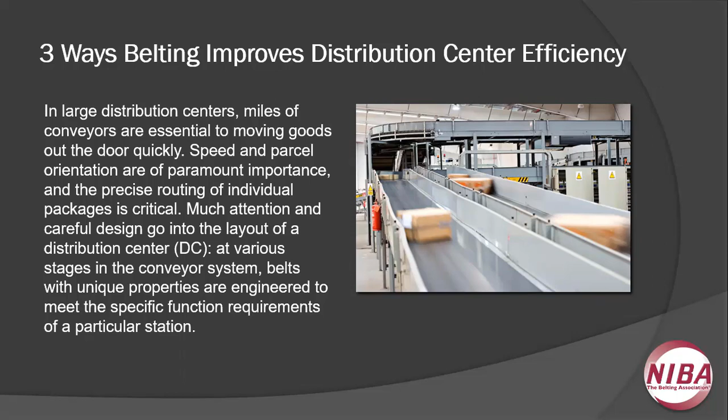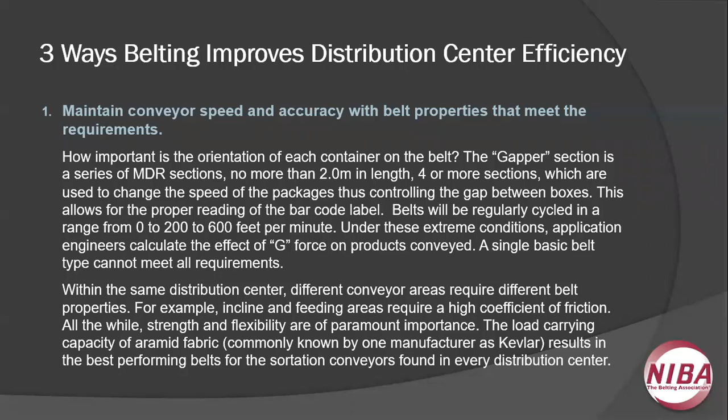Speed and accuracy are very important in distribution centers, so you need a belt that's going to be able to handle those requirements and match the performance requirements. Some of the applications we'll touch on include gappers and incline decline conveyors. Obviously the most important thing there is coefficient of friction - you don't want those packages sliding down the inclines or declines. We'll also touch on sortation lines. Aramid fabric and aramid cord works best for that application because of the low stretch of the material, and you also have very long runs on those applications. So it's important to use the right belt for the right application.

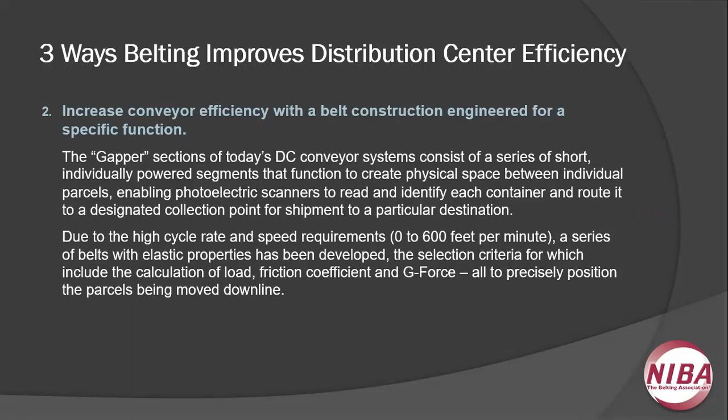Touching on gappers - gappers essentially are just a series of short elastic belts that run at different speeds to control the gap between the boxes. This is important because they're trying to get proper barcode reading. These motorized drive roller or MDR sections typically are no more than about 2 meters in length, so about 4 meters in belt length. But the important thing to note is they can run from essentially a start to stop from 0 to 600 feet per minute. So speed is a big deal in these applications.

The goal of any manufacturer in the industry really needs to be to reduce the overall cost of ownership and to prevent problems - you want to be a problem solver. In order to do that, you have to be focused on things like product positioning, tracking problems, intermittent slipping, cracking. In other words, focus on what's the biggest problem at a distribution center. Once you're able to go in there and do a little bit of engineering work and solve that problem, that's really going to open the door for you at that location for other applications. A lot of times, individual distribution centers won't realize they have a problem, so you have to have trained logistics specialists, people with experience, so they can go out there and solve those issues.

The new belt designs used to upgrade older systems is also a very important target. What happens there is you change the old styles of belts over to the current designs to give you the better coefficient of friction, and also the difference in the splicing technology, greatly reducing downtime on the older systems. This is a key to success in this industry.

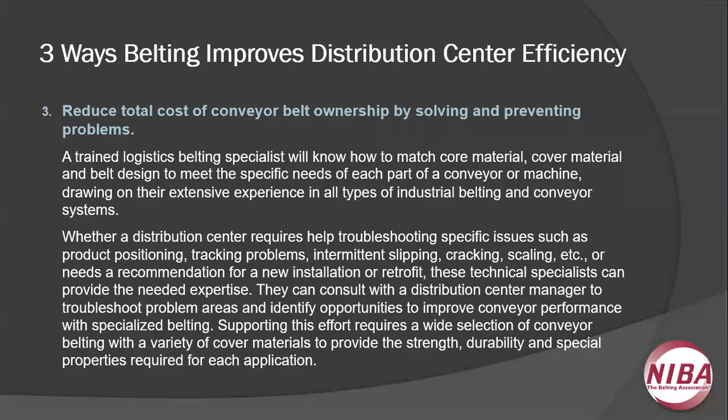So aramid cord belts and finger splice elastic belts - this has represented a large growth area for us recently. We see that trend continuing, obviously, as these technologies are much better at solving some of those issues that traditional belts have not, and traditional belts have some problems for these applications.

So aramid cord belts with polyurethane encapsulation - aramid cords, another manufacturer calls that Kevlar. It's ideal for long run applications because it doesn't stretch, so it has obviously a much longer life characteristic than what it replaces. And what does it replace? Typically lace belts. The problem with those belts that are laced is typically you'll get stretch, possibly the lacing comes out, and then what does the maintenance crew have to do? They have to go back in, they have to resplice, shorten the belt, relace the belt. So obviously that increases downtime quite a bit.

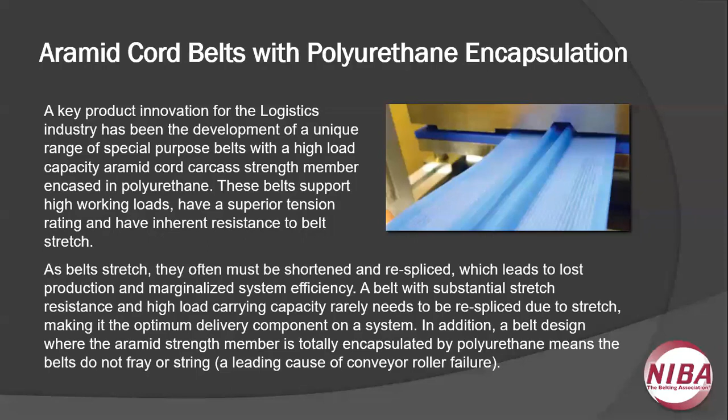The other thing that's very important to remember is that these should be encapsulated. You don't want basically the fabric layer or the cords to be exposed at the edges of the belt. If anybody's seen a live roller drive belt, for instance, that's got an exposed fabric layer, over time that'll get wound up on the side of the belt and it looks basically like a cobweb, and you'll have this big cobweb running down the line. That can obviously get caught up in bearings or in rollers and cause a whole slew of problems. Some of these belts have V-guides like the one in the picture there, but some are flat as well.

So a couple specific applications for these aramid cord belts - sortation and strip sort conveyors, so narrow belt strip sorters. Typically narrow belt strip sorters are a series of about 6 to 8 belts across. They're basically designed to move the boxes down the line to sort it, and can be left or right, can be one direction, but sort it off the line, 45 degrees, 90 degrees, just depends on the OEM and the application. They're usually about 30 millimeters wide, and the thing with these systems is the minimum length really out there is about 100 feet.

So these systems can be 300 feet. Once you find these systems, it's really important to focus on replacing some of those hook belts.

And then live roller applications. So again, these systems are the same as the narrow belt strip sorters. They can be 300, 400, 500 feet of belt. So the aramid cord is really key here because it doesn't stretch, and obviously it solves a lot of problems, which decreases downtime. And of course, these can have a lot of different surfaces. You can have fabric bottoms, you can have rubber covers, just depending on the OEM and the equipment design.

And what's important to realize there is you can include a Dutchman on some of those longer runs, and that'll allow you to use up some of your remnant stock that you might have sitting out there on your shelf.

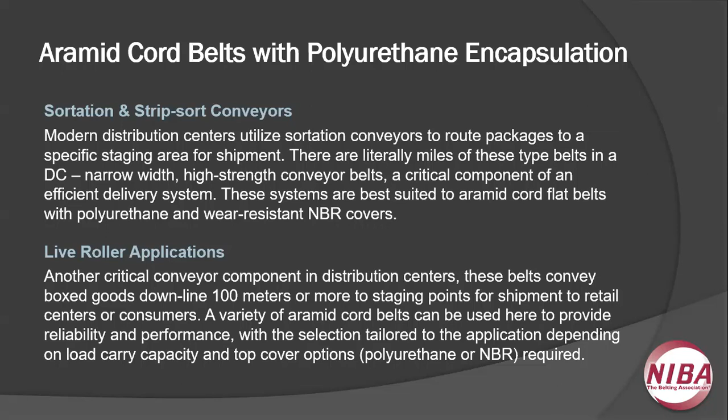And it's important that they be lightweight enough that you can install a belt, because oftentimes these live roller systems are 20, 30, 40 feet in the air. So you're doing this on a scissor lift, so a water-cooled press really isn't an option at that point.

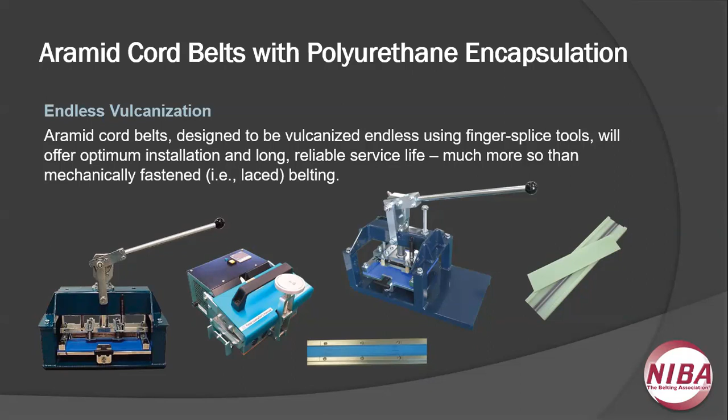And it's also important to have these because one of the objections we get is, well, we don't want to buy a set of tools. So if you have a set of tools, you can go into that individual location and install the first belt for them so that they can see the performance benefits, and then they can realize that they're going to spend less over the lifetime of the belt, which will more than offset the cost of the tools.

So modern DCs and elastic type belts. This is a really fast growing segment. Elastic belts are obviously replacing some of those used on MDR and gapper belts, and they're replacing the belts that are laced. They're running at higher speeds, up to 600 feet per minute.

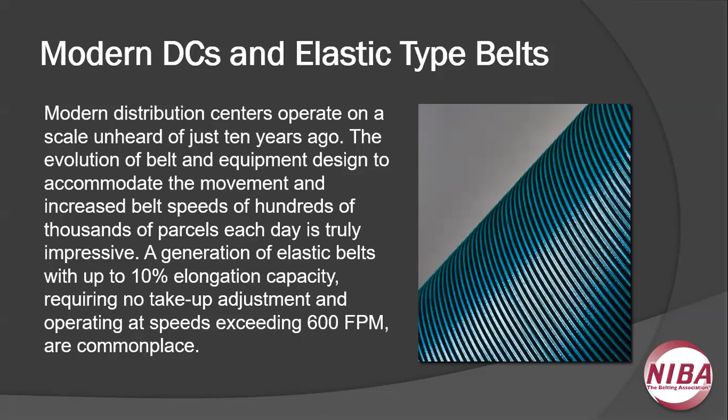Obviously a lot of different cover types available, a lot of different materials. There's urethane, there's PVC belts, there's flat styles, there's ribbed like the one in the picture. There's also little mini rough top belts as well. They're designed up to 10% elongation capacity, but typically your installed tension is going to be around 2 to 3%.

So logistics applications, onto some specific applications at distribution centers. There's a couple different types of sortation systems, generally speaking. There's your linear type and there's your circular sortation type. Obviously linear are just straight, and circular are in a circular pattern.

But some of the different types of linear systems, it can be like a shoe sorter or a narrow belt strip sorter. We've touched a little bit on the narrow belt strip sorter, but a shoe sorter is typically chain driven, so there's not belts on a shoe sorter. But it's important that your salesmen and your staff know what a shoe sorter is so that it gives those individual maintenance managers at a distribution center confidence that you know what you're talking about.

And then, of course, there's circular systems. Cross belt sorters are one of the most popular, but there's also tilt tray sorter systems, and obviously the tilt trays don't have belts. But with the cross belt sorters, they're basically running in both directions, the belts, and perpendicular to the flow of the system. And tilt tray does the same thing, just with a tray, and a tray drops down during the sortation process.

It's important to note that the large linear and circular sortation systems at the plant location, usually they're in a building that's 100,000 square feet up to 500,000 square feet. They're huge systems, and everybody's driven by Amazons and also by Walmarts and know how big those are.

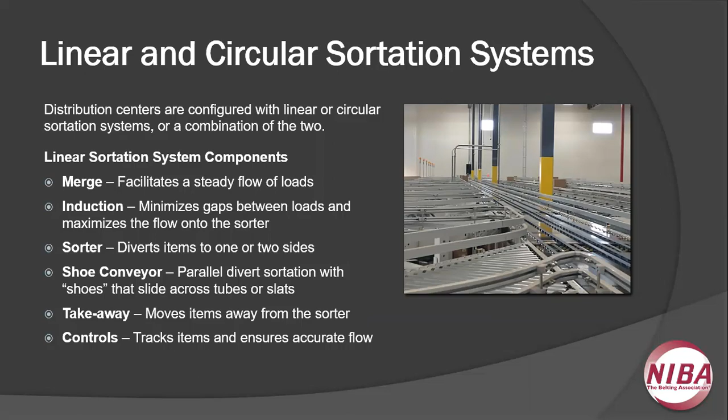Now touching on the components of a circular system. Obviously, you've got your feeding in, your merging into the system. This can include measuring and preparation, where you're lining up the boxes, gapping, merging, accumulation, or slug belts.

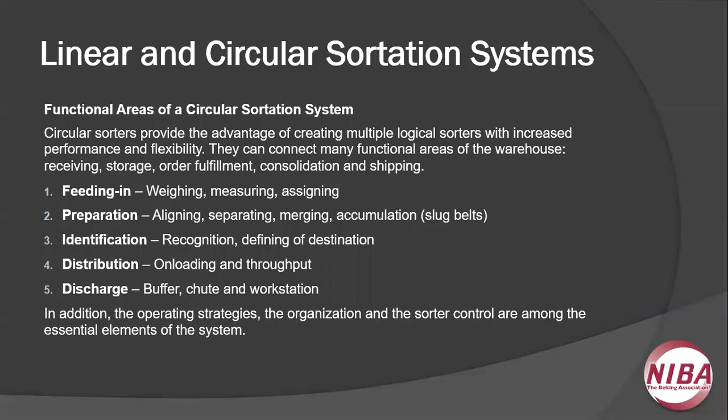You've got identification as well, so boxes are going to be scanned, and based off this information, the sortation system knows where to deliver or sort them. Then distribution, the actual sorter. And then discharge, where packages come off the sortation line. Again, this whole system is controlled by the WMS or WCS systems.

Now just going over the actual process overview at a distribution center. The first being the input stage. Telescopic loaders, basically conveyor systems that telescope out into a tractor trailer to aid in unloading the boxes. And then you've got picking stations as well.

Picking stations are going to be involved in all distribution centers, but it's important to note they're especially common and well known at places like Amazon. And that's not really a distribution center, that's what a fulfillment center is. So when you order things from Amazon, say a shaving cream, a box of golf balls, and a telephone, an individual is going to go out into that facility, pick those things, and put them on the conveyor system, which then goes down through the sortation system and into packaging.

That's typically a fulfillment center, whereas a distribution center is more along the lines of a regional distribution center for a retail chain, taking in boxes, sorting boxes, and then shipping boxes out to individual stores. Merging and gapping.

Merging, accumulating, and gapping, basically getting the packages ready to enter the sortation line. And then identification: you go through checkweighers, scales, scanners, which take all the information from the package, the barcodes, the size, the weight, the address, all that stuff, so it can go to the next part of the process.

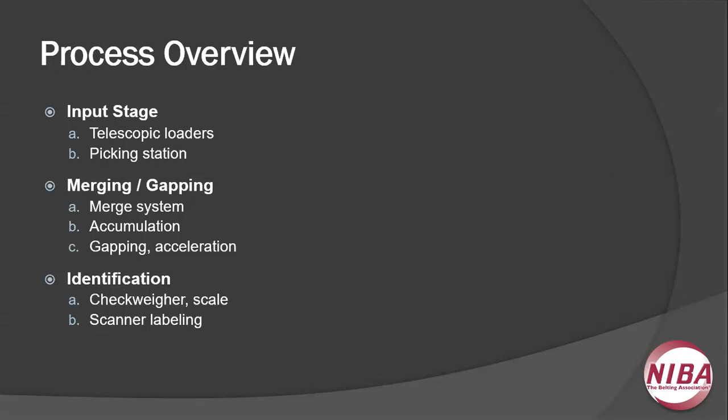Now the induction to the sorter, basically belts entering the sortation line. This can be a single belt, but in some cases it can be narrower multi-belts across. Then into the sorter itself, you've got a number of different types of sorters. We've talked about a couple: the cross belt sorter, the belt diverter, the pop-up sorter, the shoe sorter which is chain driven, and of course narrow belt strip sorters.

And then into the outfeed, the final stage. There's deceleration through decline conveyors, then through your outfeed systems, and then back onto the telescopic conveyors, which are going to reload that tractor trailer with the boxes, ready for delivery.

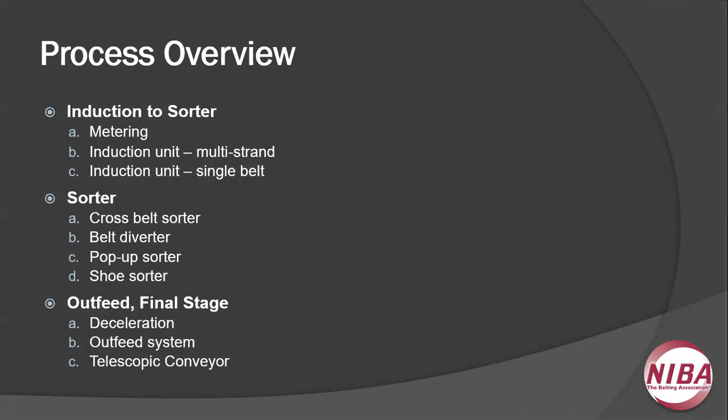There's also going to be a lot of auxiliary conveyor belt systems throughout the entire distribution center. You'll have things like line belts, just standard horizontal PVC conveyor. You've obviously got power turns, which can be both 90 degrees and 180 degrees. You've got incline/decline systems, usually PVC ribbed, but there can be different cover profiles as well, like chevron waves or rough tops. And then rat belts is another one.

It's a right angle transfer belt. We'll touch on that a little bit as well, but obviously they're moving boxes 90 degrees off one line to another. You can have swan neck conveyors, basically taking a package up and over something. And then obviously pallet shrink wrapping, which shouldn't be forgotten about in the distribution center.

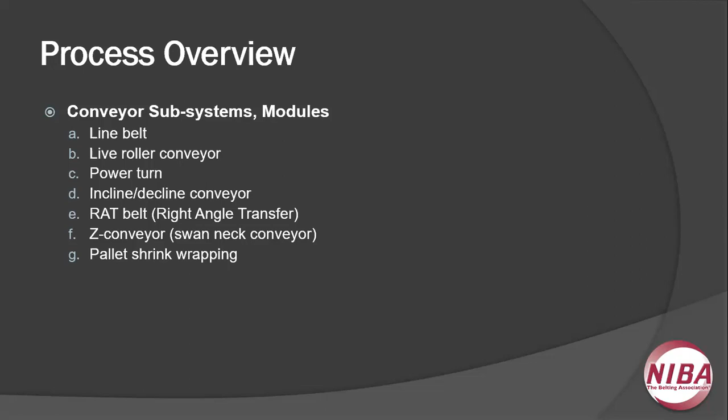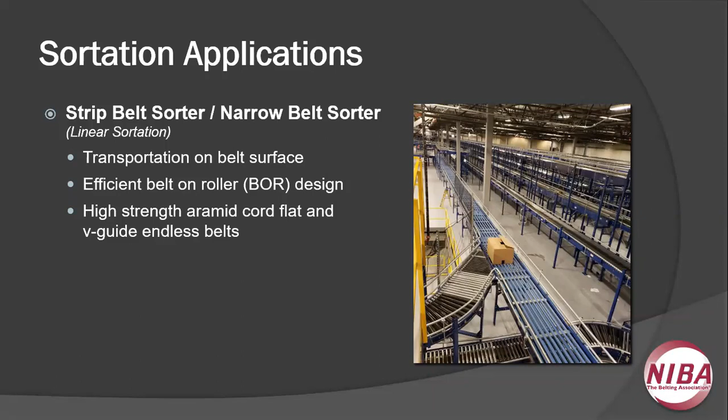It's important to note that there are still several manufacturers that supply hooked belts into the industry for these applications instead of endless belts. If you come across this, where it's a hook belt, you'd be very wise to recommend they take a look at the splice belt. We'll go over the difference in life characteristics in a bit, but it's a pretty easy transition to go from a hook belt to a finger splice belt. Depending on the OEM, some of these applications will have a V-guide on the back, some are straight flat belt, but that's something each individual OEM specifies.

The rat belt - in most applications where you start seeing these in large DCs, there'll usually be more than 75 to 150 of these in one location. It's a lot of belt. They're narrow, but it's a lot of belt.

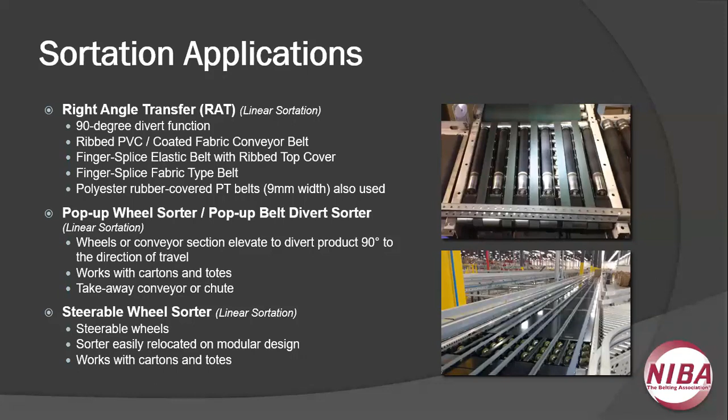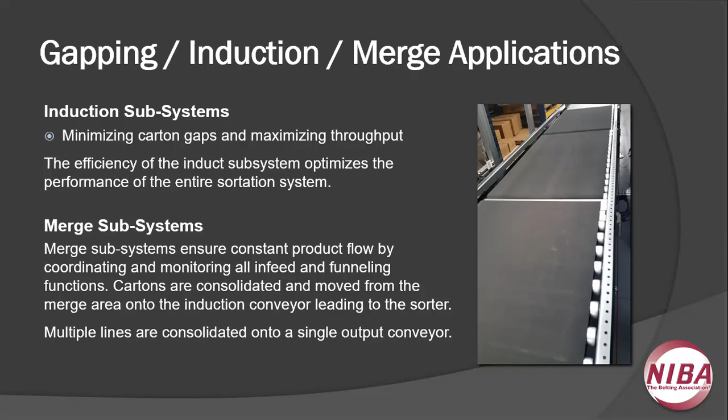Different parts of the gapping, induction, and merge applications: you have your brake belts, pretty self-explanatory, slowing the box down. You have your metering belts, your segmented belt on roller or SBOR applications. More and more we see that finger splice elastic belts are used in these areas, replacing the laced and hook belts. Different cover patterns are available. Some manufacturers and OEMs still use those hooks and laces, which decreases the overall life and performance of the belt.

They are easier to install, however, and that's the main objection you're going to get in the field. What's interesting though is some OEMs are working on systems that use an elastic belt that's just as easy to change, so that's a future direction that's going to be taken. Most of these systems are all going to be 4 meters in belt length or less. The thing to realize is in large processing DCs, it's not uncommon to see literally thousands of these SBOR, motorized drive roller belts in one facility.

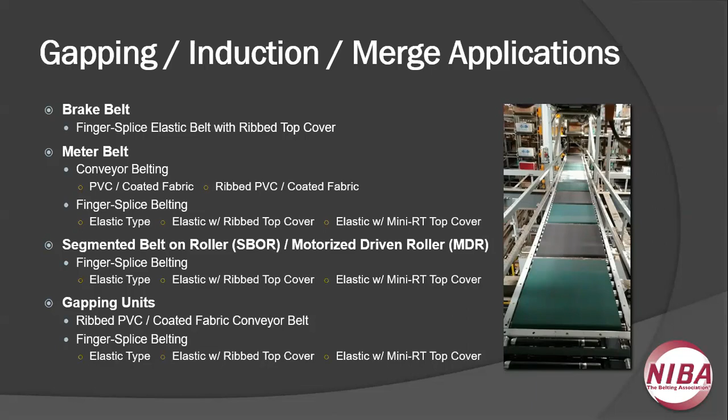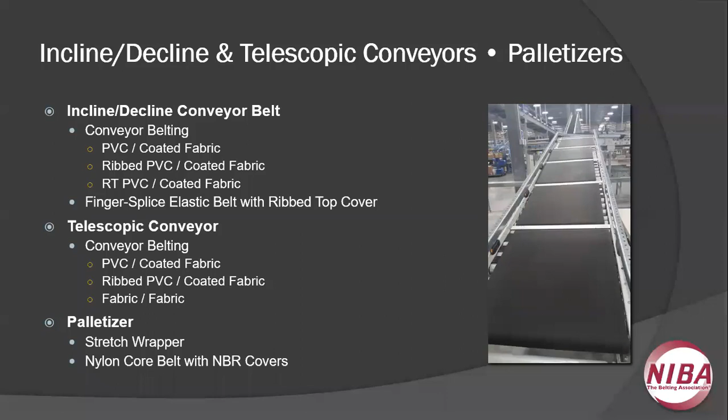For incline-decline conveyor, obviously PVC is mostly used, can be ribbed, can be rough top, zigzag wave - different covers are available. Then onto your telescopic conveyors, usually fabric or smooth top PVC, both used in the unloading and loading of the tractor trailers. And then the palletizer - as I mentioned before, basically a nylon core belt is often used as a drive belt for the system. It's either controlling the spinning of the pallet being shrink wrapped, or controlling the mechanism that actually shrink wraps the pallet. That's something else to focus on when walking through a distribution center.

It's also great for marketing campaigns. We've used that for our marketing campaigns as well.

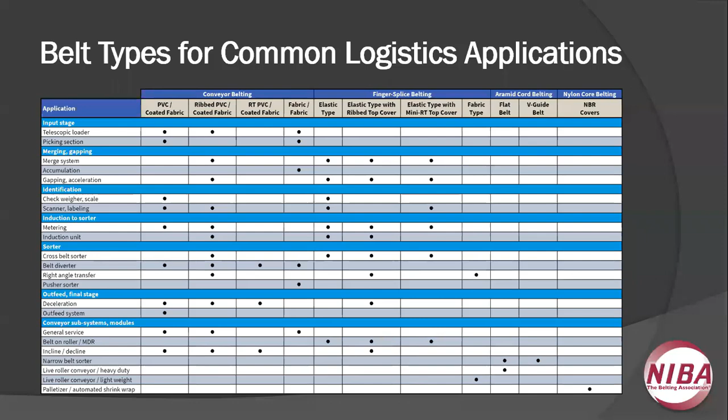And then there's one here at the bottom, third one up, the live roller conveyor heavy duty, third one from the bottom. A V-guide should be checked on that, so it's something we have to correct. Just add a little check mark to the V-guide column that was missed.

Now on to some success stories. And honestly, we're not telling success stories to tell you how great we are. The main reason we're doing this is to give you some ideas on the opportunities available, but also to give you some concepts of the different objections you might hear.

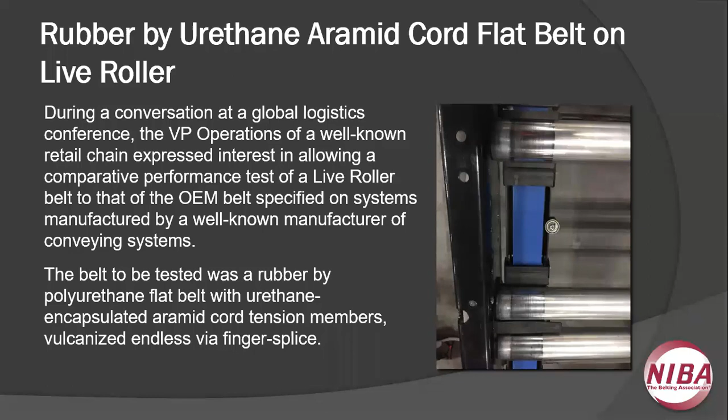So we were approached, or came into contact with, the VP of operations of a well-known retail chain who was having issues with his live roller system at one of his distribution centers. After hearing some of the issues he was having, we recommended this aramid cord polyurethane encapsulated belt, which would be vulcanized on the system by our team.

So basically, after going through that process, our belts after 2 years are still running. The old belts, he was only getting 4 to 5 weeks. Some of the issues he was having are very common: the lacing was coming out, they were stretching, causing a lot of downtime just going back in there and replacing or shortening the belts.

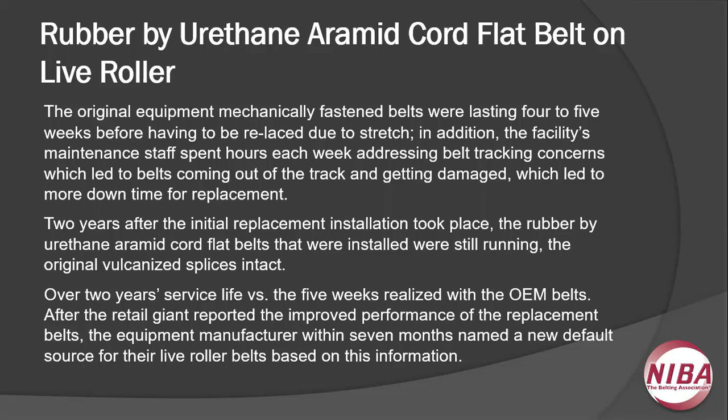So once realizing he could get over 2 years with our belt versus 5 weeks with what he was getting before, he started switching out a lot of his other distribution centers, and we became one of his suppliers for that application.

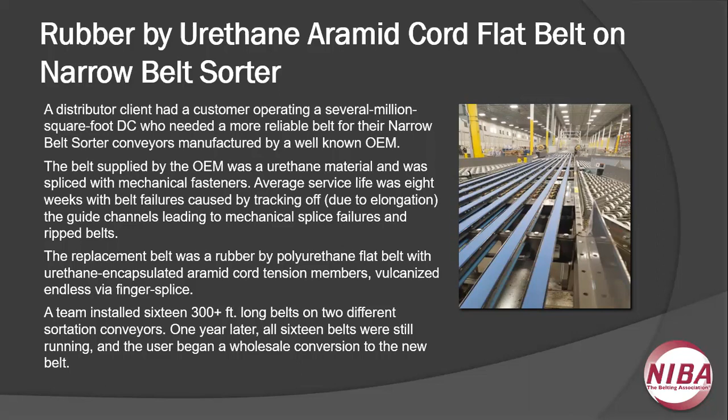So one of the things I'd mentioned before is tooling cost. Some individual locations can say, well, I don't want to spend the money on tooling. I just want to point out, can you imagine if this distribution center had adopted that attitude? So that's something you have to be focused on moving forward.

But what's important to focus on here is twofold. Number one, there were over 3,000 belts in this distribution center, and that's not a large number -- that's not uncommon, in other words. So these different distribution centers can offer a really big opportunity for everyone.

And the other thing to realize is when you see a belt causing problems, it's important to do a little engineering work so you're not just replacing the belt with another of the same size and style, because the real issue could be something like too much tension on the belt because it's too short. So you have to figure out what the problem is, so then you can engineer a solution.

Couple of points here in closing. The year-over-year growth through 2025 in the logistics, e-commerce, warehousing, and DC centers is estimated to be 7+% year over year. This year may be a little bit stifled due to what we're going through right now, but this is a global number. This isn't just a regional number.